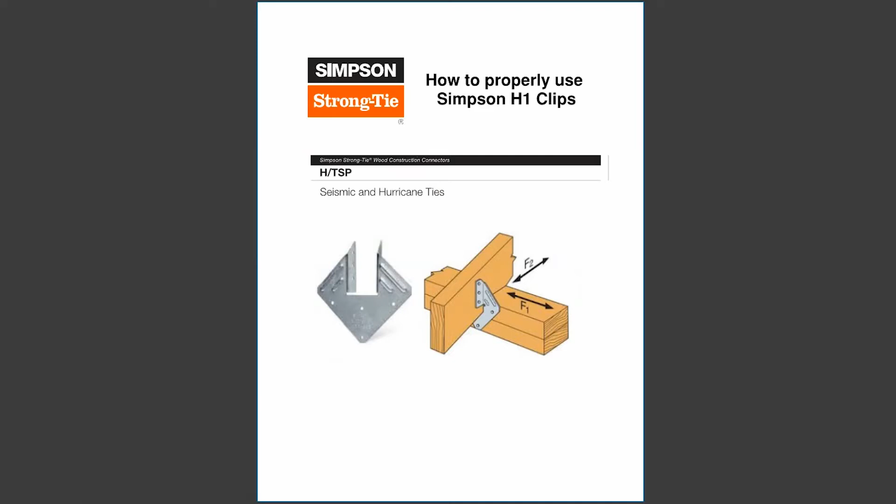Despite the fact that it may not be common in some of the other areas in which we design, it certainly is a real thing that happens, especially if you live in hurricane country. We don't live in hurricane country, but it certainly is a very real phenomenon when you live somewhere that has an exposure C or D, or if you have a high wind load.

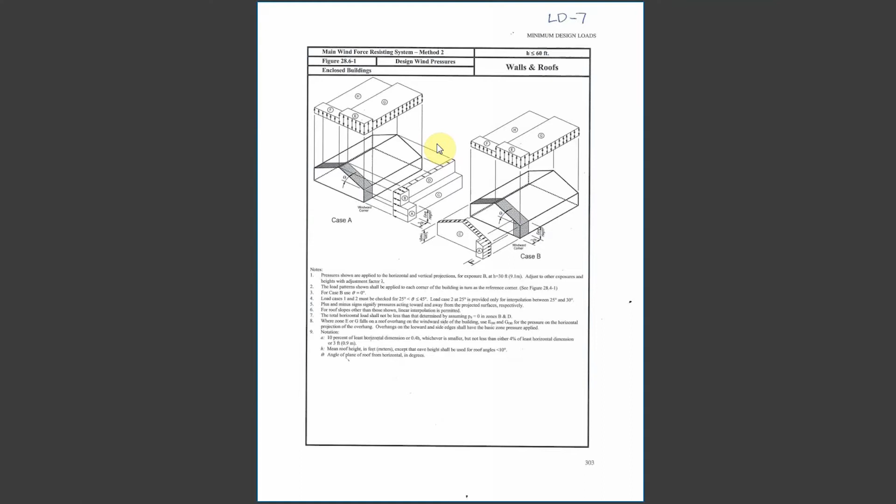So the nuts and bolts, here we go. I'm sure all of you recognize this from ASCE. This is our wind table. And very clearly, they think this is a real thing that can happen, which in our experience it is. So using that, of course, we go into whatever spreadsheet that you are using for your office to go ahead and find your net wind pressures up.

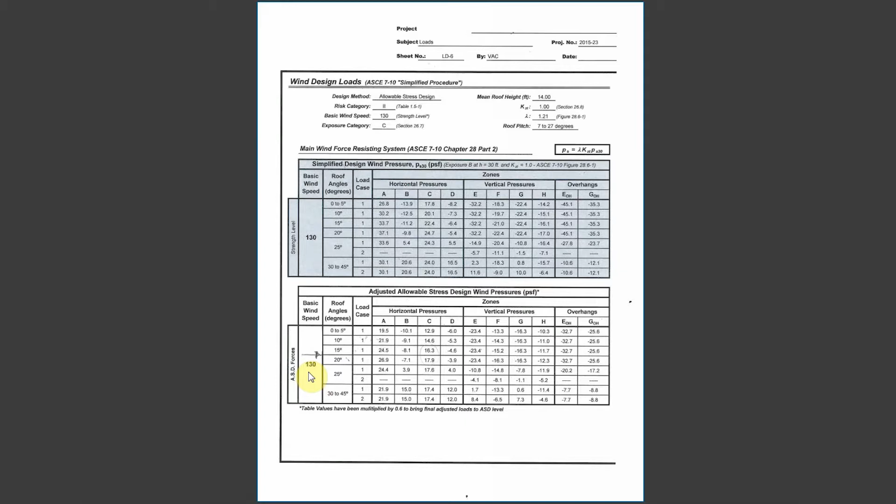In the Reno case, of course, in this area, we're 130 miles an hour, which might be a bit higher wind than you're used to seeing within exposure C. So if you have a light roof, like a composition tile or something like that, it's really not hard to get there pretty quick.

I would greatly encourage people to take a look at this bulletin. It's not something that most engineers that I've run into are aware of, mostly because I think what you're going to find out is these clips predominantly are installed on the inside of a wall where they do not have a complete load path down to foundation.

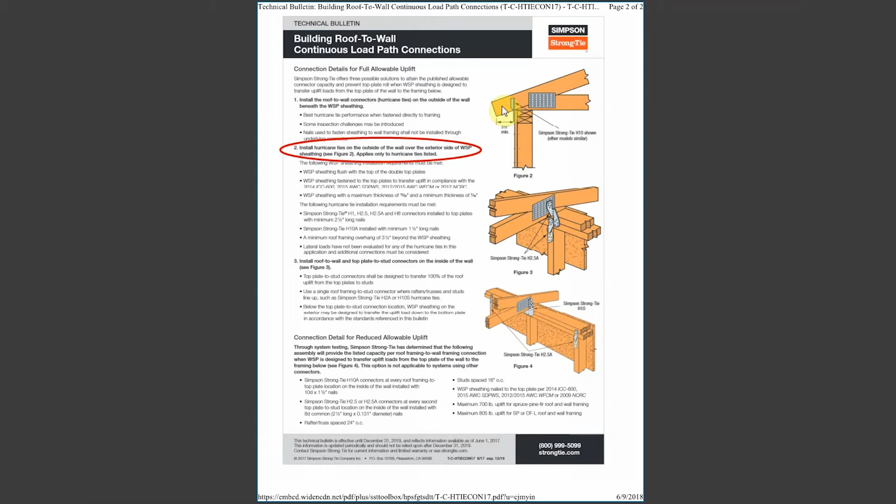So 2 things are going on. A, they don't want those clips in the way when they go to roll the trusses out, so they don't put them on ahead of time. And then once they get up there in the air, it's easier for them to get in and nail that clip from the inside rather than the outside. This doesn't have to be a 2-story condition. I think you'll find out that they are so used to framing this way that they nearly always put these clips on the inside, which, as we saw back here, is not per the recommendations or guidelines of Simpson Strong-Tie.

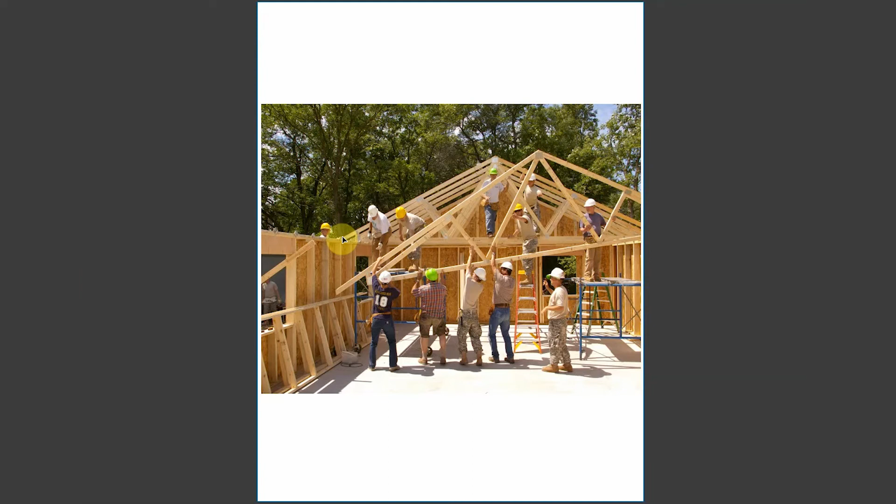So I did a little digging. I found these guys happily at work. Look, they're putting up their trusses. Oddly enough, they have their clips in place as they're going, but they are not doing the typical dragging the trusses across the line. It looks like in this particular case, they're actually hoisting them up one by one into place.

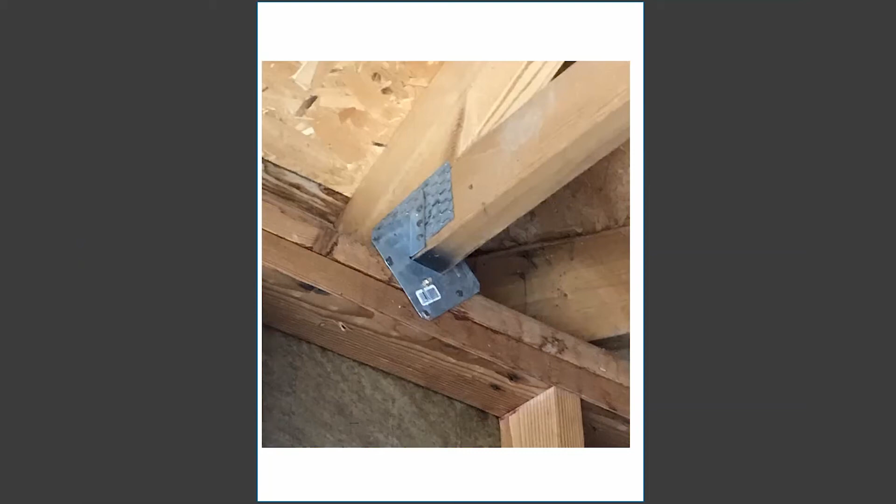And unfortunately, I think you'll see what's going on. Here are our little clips, wrong side of the wall. So does this happen often? Is that a real thing? Am I just making that up? Well, I did a little digging, it didn't take me long. Went out in my garage, boom, and there it is on the inside. Has my house fallen down? Has the roof sucked off? No. I do have a concrete tile roof though.

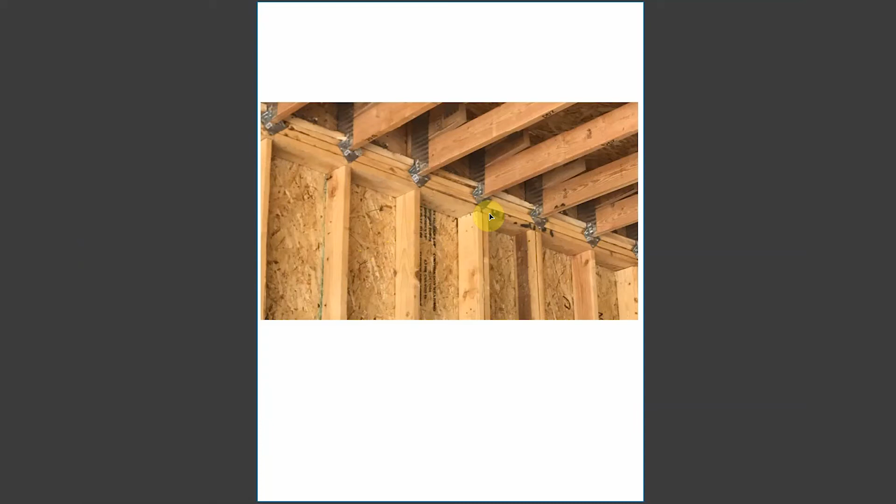Here's a picture of a big, huge mansion, probably 5,000 square feet. They're building about 2 miles from my house. Whoops. Same thing. He'll probably have concrete tile. Maybe he doesn't have to worry about it. So the question is, say you have a project and you have your hurricane clips, or the H1, that gets installed on the inside. What do you do? Because our typical detail does show it that way.

Well, there are solutions that are at the disposal of the contractor. He can go get these clips and put them on after he's screwed things up, basically. Will they like you? Not so much. This is added expense, added work. If only they had done the clip on the outside.

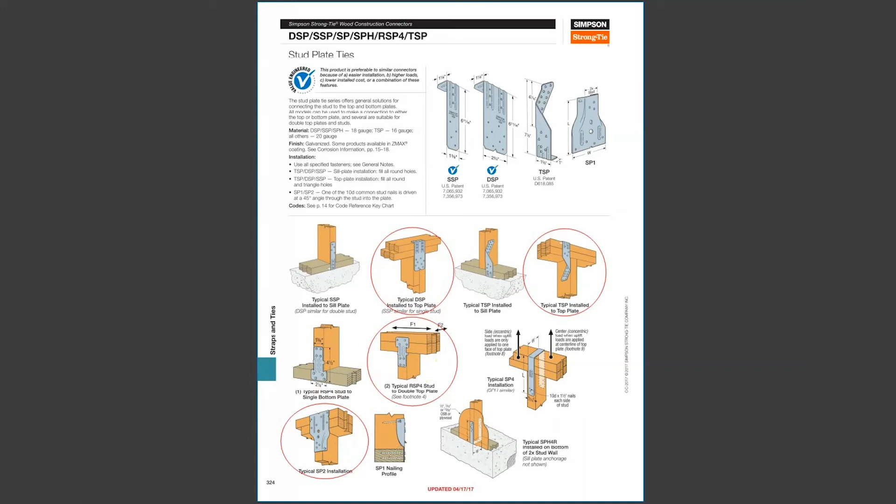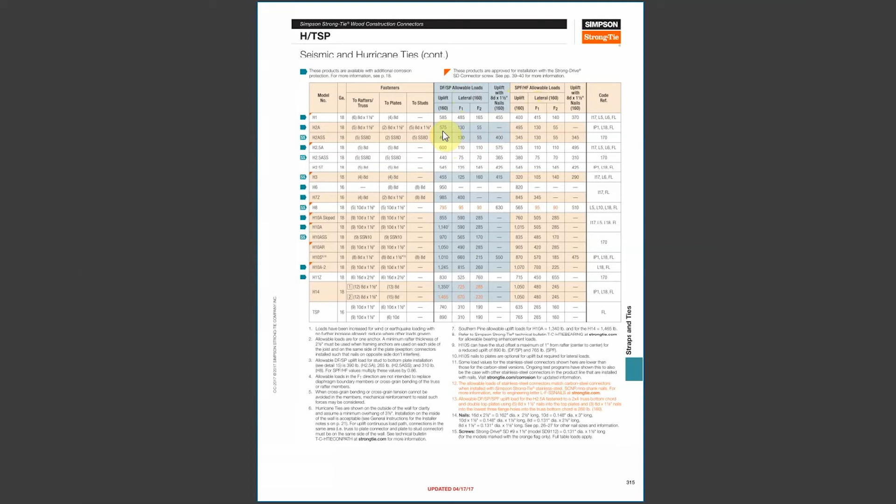So let's take another look at something that's interesting about the hurricane clips and ties. As you know, they're going to give us loads for Doug fir and spruce pine. They're going to have spruce pine fir and hem fir as well. And if you take a look at these loads in here, they're quite a bit reduced when you look at the different species of wood for the net uplift. Well, why is that? What's so special about these guys?

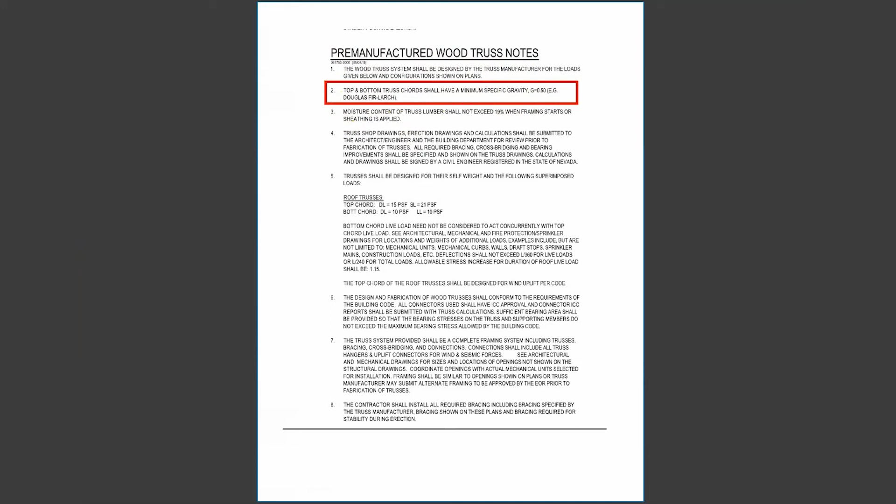Well, you know what? You really don't have to care, right? Because look, we're saved. We are saved because we tell everyone in our general notes the specific gravity of the trusses that we use has to be 0.5, which is Douglas fir, right? So who cares about this? We don't need to worry about that. But say you did have to worry about it. If we go into the NDS, you can find out what the specific gravity is of something that has shown up on your job, unfortunately. And sometimes, there it is, hem fir.

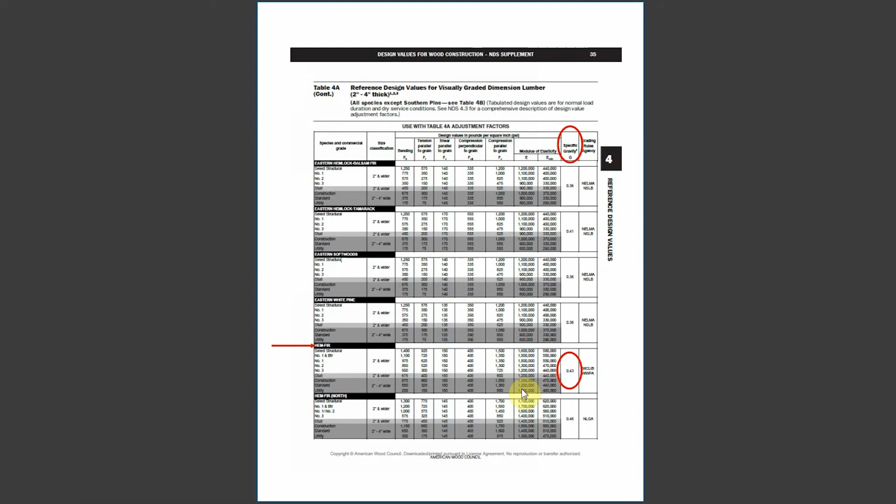Even though you've told them not to do it, can it happen? You can find that specific gravity over here in this table. Come on down the line and find out that it's not 0.5. It's actually quite a bit lower. Hence, the reduction in the load. Right there. So we have these general notes that say Doug fir. Doesn't happen in the top chords. Well, here's a truss calc that I actually have in one of my files. And it looks like they use the hem fir.

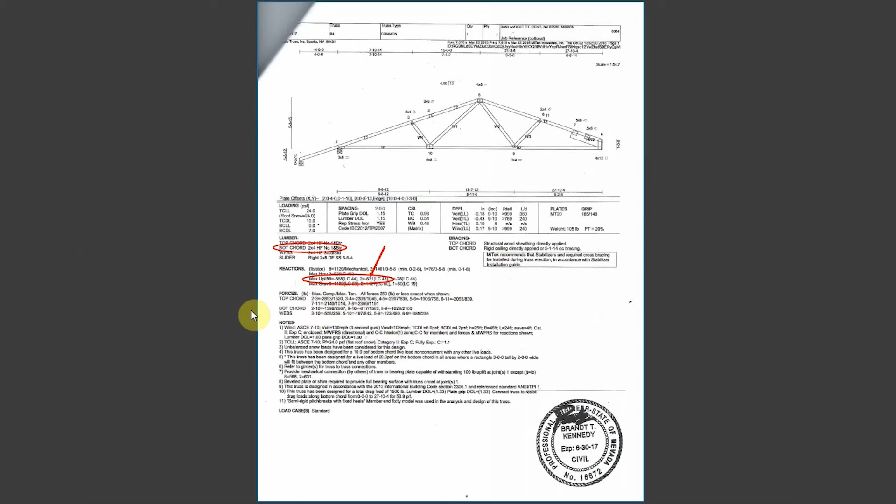Okay, well, you know what? Hey, maybe I don't have net uplift. Maybe I don't have to worry about this. Maybe the H1 clip will come save the day. Oh, look at this. We do have uplift. And not only that, it's in excess of just a basic H1 clip. So if the knee-jerk reaction is to stick an H1 clip on everything for a positive connection, is that the right thing to do? We have to take the time and look. We can't just assume.

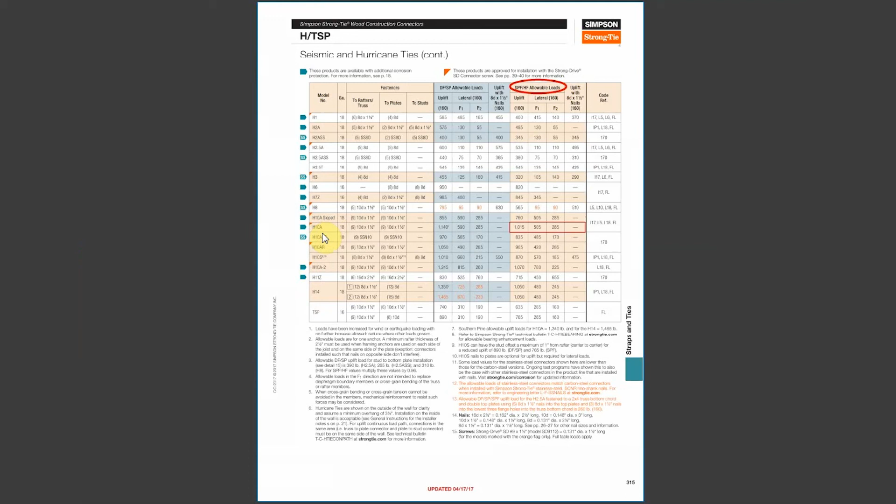So looks like the best that we could have done with a hem fir is about 400 pounds of net uplift. This guy had 631. You have to pay attention. You have to be on your toes. And then you get to call out the bigger guys. Again, does this work if this is installed on the inside?

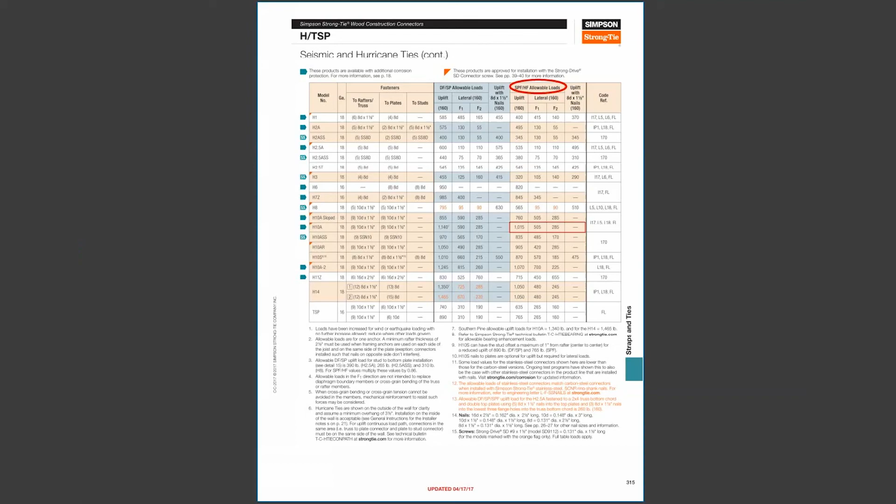No, it sure doesn't. So the moral of the story is, don't take for granted our general notes and our typical details. We show what we would like them to do, but that's not always what's happening, and there's a reason for that. It has to do with the construction standards and how things are actually built in the real world. Remember, just because you call for it as an engineer, it doesn't mean that it's going to happen that way, because what's easier for them?

Again, this is a strange bird. Maybe it's because these have a heel and they're able to lift over. I don't know. I don't know why they put these clips on the inside when they lifted the wall. Maybe somebody thought they were being smart and being helpful. But they did get it wrong, didn't they?

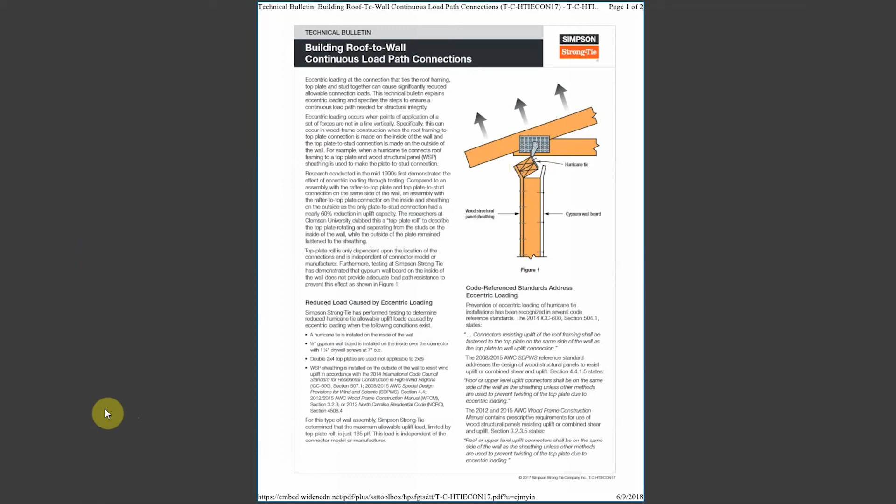So if anyone would like to look up this technical bulletin, you can go to Simpson Strong-Tie. They actually have a tab on their website, and it took a little digging for me. But I knew this bulletin was out there, and I've shown it to quite a few engineers. And if you get a contractor who gives you grief about trying to stick these clips specifically on the outside of the wall, you can pull this up and show it to them, because when they don't follow this, they voided the warranty on the product. They are no longer backed by Simpson, and they're no longer backed by us. So just something to look out for.